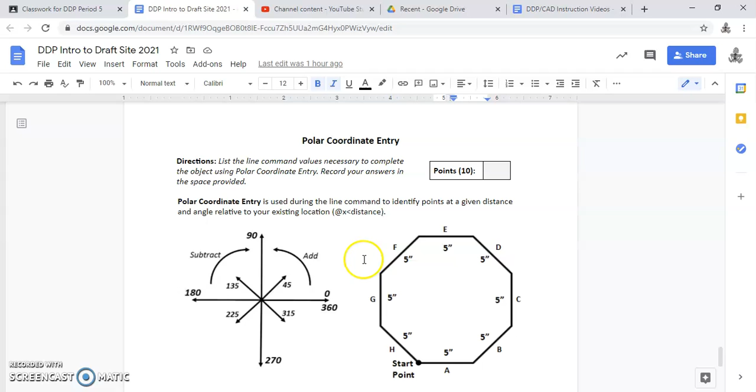Just like relative coordinate entry, you're going to use some symbols. You'll use shift 2, the at symbol, followed by the distance you're trying to go—in this case 5 for each line segment—then shift comma, the less than symbol, which refers to angle. So the format is: at distance less than angle.

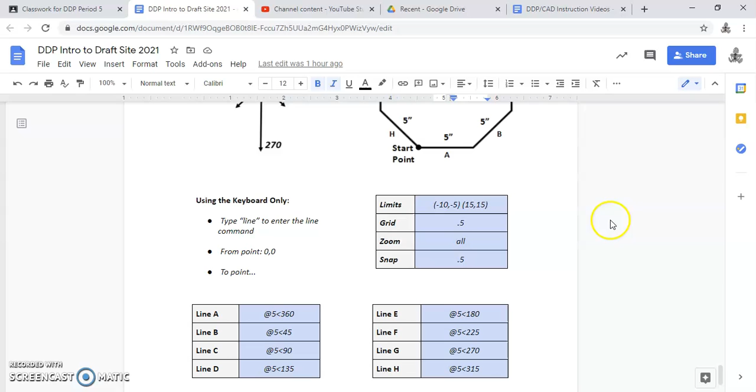We're starting at our 0,0 point. Remember, we talked about the limits giving us enough room in case we go into the negative quadrant. Up here to the left gives you an idea of how to get to where you're trying to go at specific angles.

In this case, the octagon, each one of these segments is going up at a 45-degree angle, 90, and you have to add if you're going to the left, subtracting if you go to the right.

So what do I mean by that? If I'm going here, in this first case I'm going off to the right, at 5 less than 0, or 360. As I'm moving up in this direction, I'm adding degrees: at 5 less than 45, moving up again at 5 less than 90. So here I am at 90 degrees straight up, plus another 45.

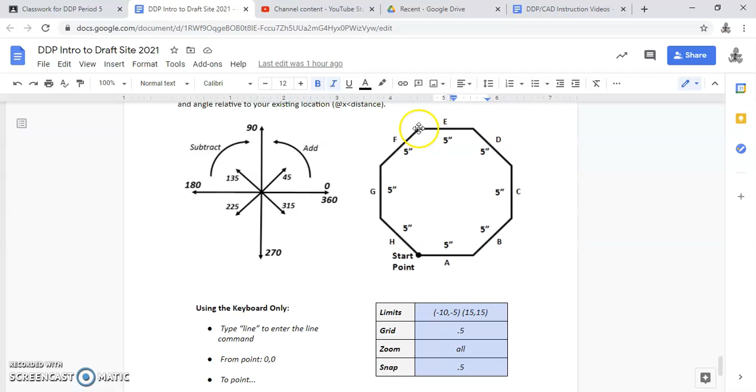So at 5 less than 135, at 5 less than 180, and so forth, I'm adding—225, etc. We went through some of these in class, so hopefully you have those entered, or you can use this video to help you out.

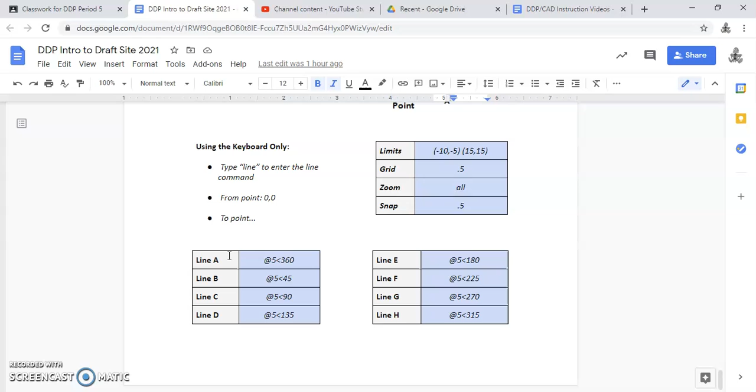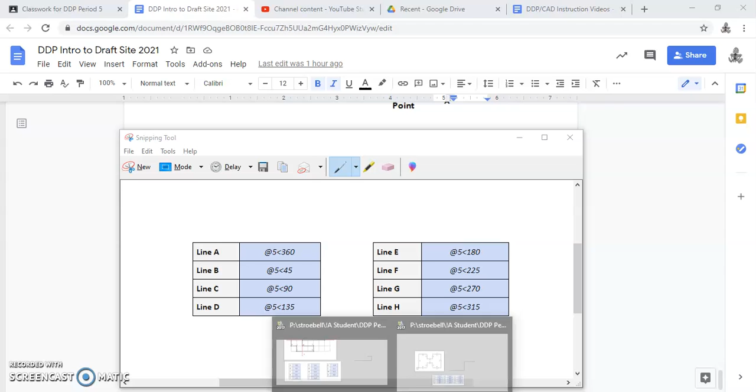I'm going to take a screenshot of those coordinates and paste them right into my drawing. I'm going to copy those, and let's move over to polar coordinate entry.

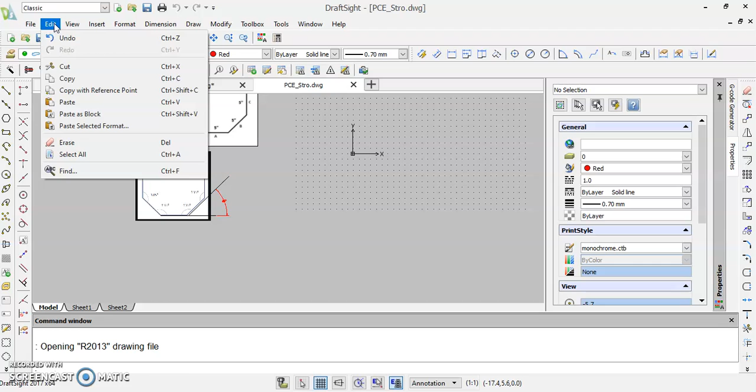Okay, so again we've shown you a few different models on how to figure out what the angles are. I'm going to paste in my coordinates just by clicking and dragging.

So I'm going to start at 0,0, line 0,0. My first coordinate here is at 5 less than 360. My next coordinate is at 5 less than 45. At 5 less than 90.

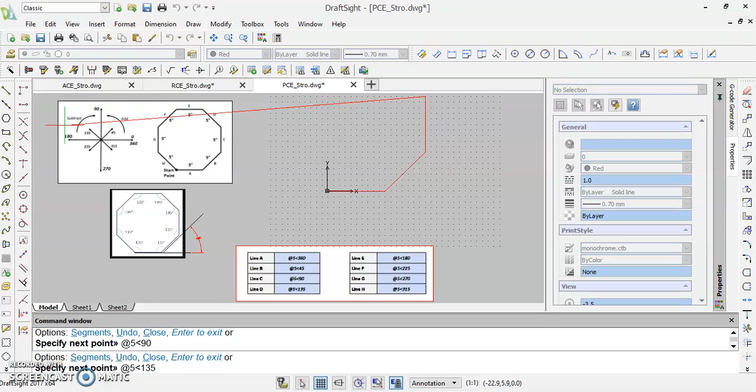And then we'll make our way back at 5 less than 135. Okay, and you can see how we're making our way around. At 5 less than 180. At 5 less than, let's see, what's our coordinate here? 225.

At 5 less than 270—let's type that right—straight down. And you can just continue this by typing in coordinate 0,0.

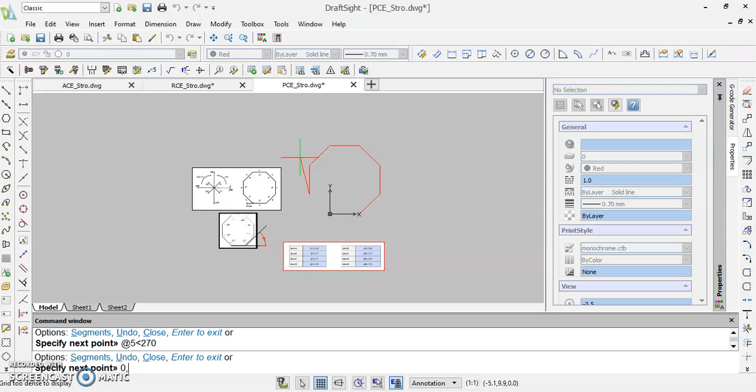And that's it. That concludes polar coordinate entry using angles to draw some of these shapes.